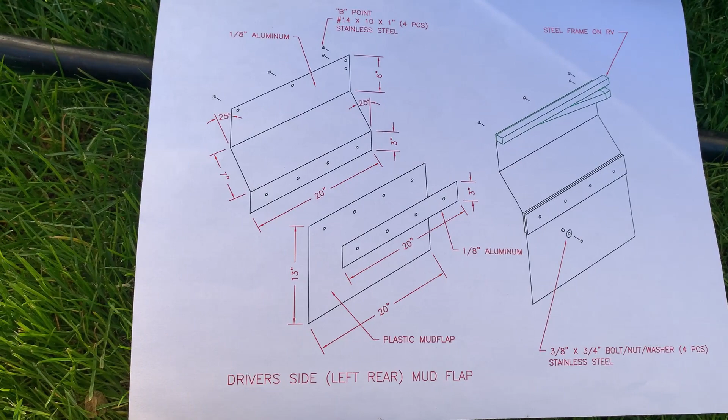So I want to show you the drawing first and go over all the pieces and parts before I show you them on the RV. This is the driver's side, just to give you an idea for orientation. This piece here is going to be the main mud flap, made out of 1/8 inch aluminum, and I have all the dimensions here, and even the angle. And then these holes here are for mounting the back plate.

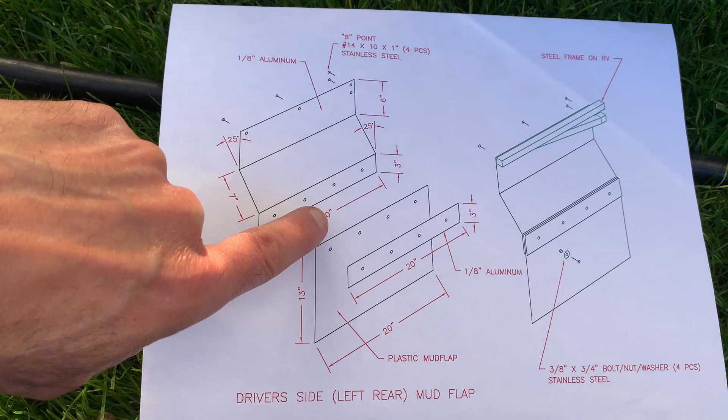The back plate is also aluminum, and I have the dimensions there. And then this piece is actually the plastic mud flap. This piece and the back plate are what you're going to need to fabricate out of 1/8 inch aluminum. If you have access to 1/8 inch plate and can bend this yourself, then awesome, cut it up, do whatever you need to do.

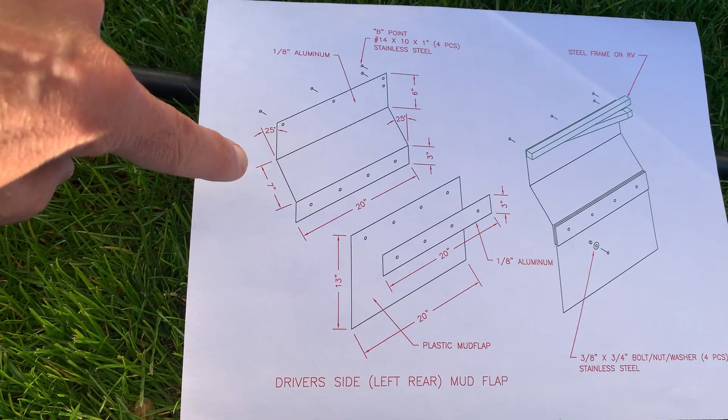If not, you can always find a sheet metal shop, like I said. This side of the drawing shows where it's all connected - you see the back plate, the mud flap at the bottom, and where it attaches to the structure. I'm going to show you that under the RV.

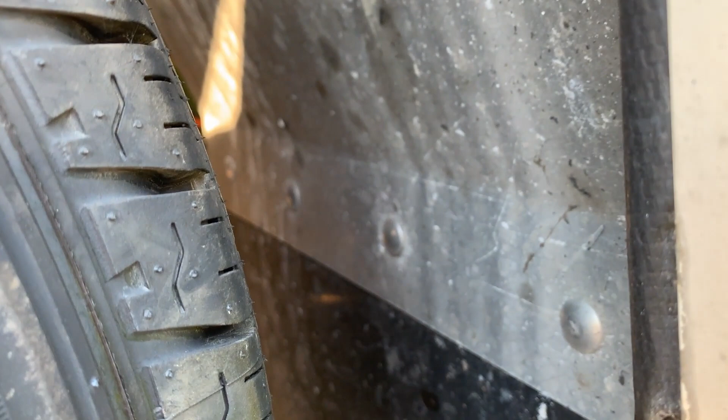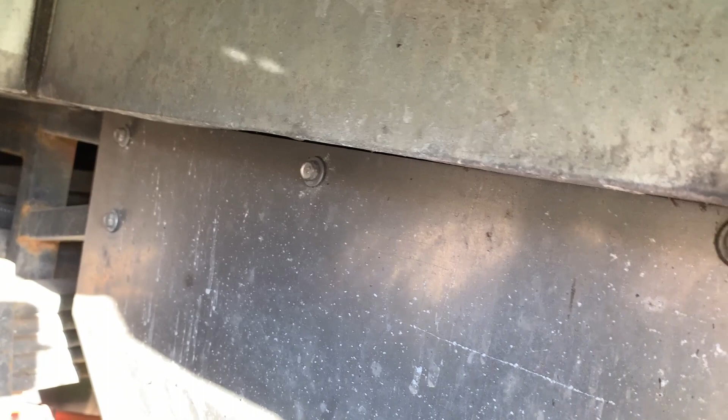Right now we're looking at the main body of the mud flap. You can see at the bottom it comes up, angles, and attaches right back up into the frame. There are 3 fasteners on top, and 1 fastener in the back attached to the bracing to keep it from flopping back and forth. This is the main body of the mud flap.

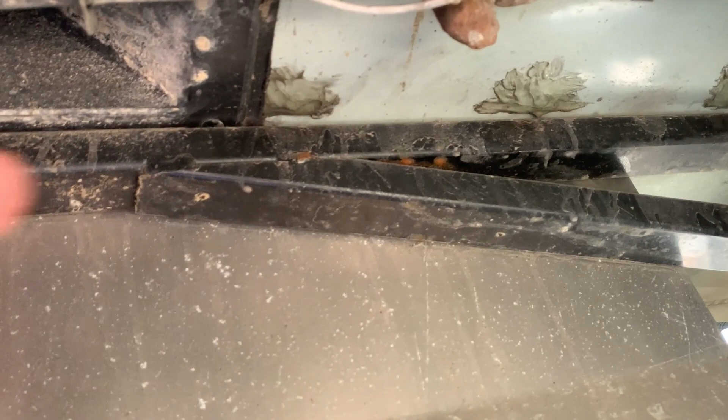This is the inside, and you can see that lateral brace as it goes across. You won't see the fasteners sticking out because they're only fastened on one side - they're not through bolts. They just fasten into this piece of steel. So again, that's the main body of the mud flap.

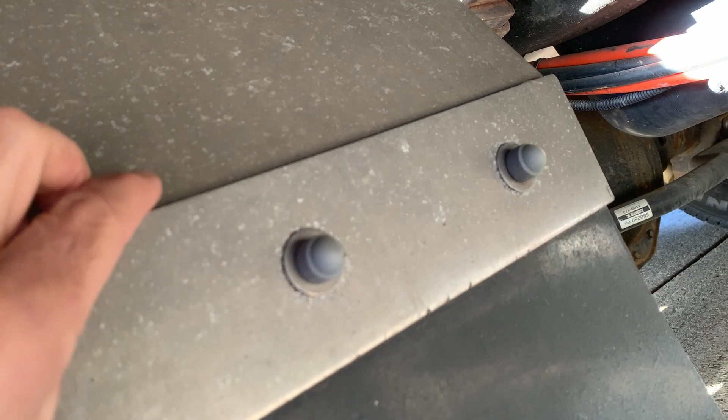Now this is the 3-inch wide back plate, and this is what's clamping the plastic mud flap to the main body up here.

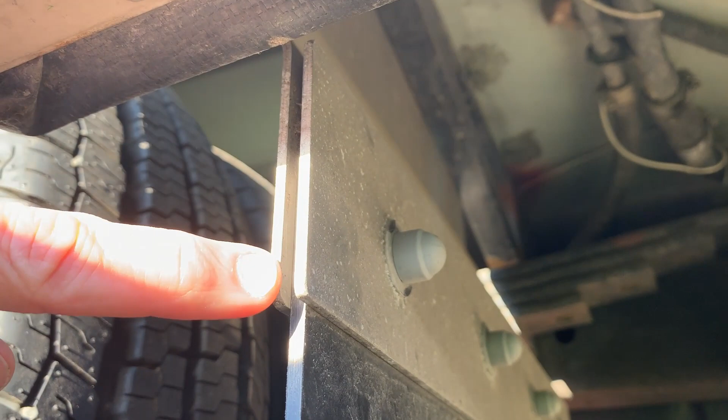Here's a side view. This piece here is the main body, then I have the plastic mud flap here, and then the back plate that's attached. As I swivel around, you'll see the front of the fastener, the carriage bolt side, is nice and smooth, so it won't catch any dirt or anything.

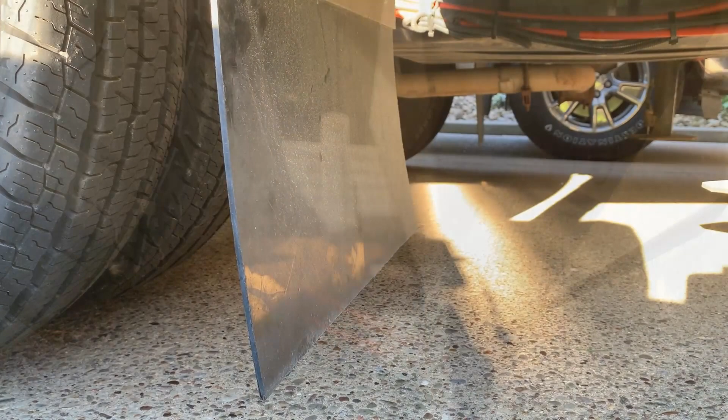The reason I did this 2-piece design is because I wanted it so that if it caught the ground, it could bend. There's actually scratches on the back already, but this piece is replaceable. So if I go over a curb and this snaps off, it's not going to damage the top aluminum here. This is sacrificial, this is breakaway, this is throwaway - I can replace this no problem.

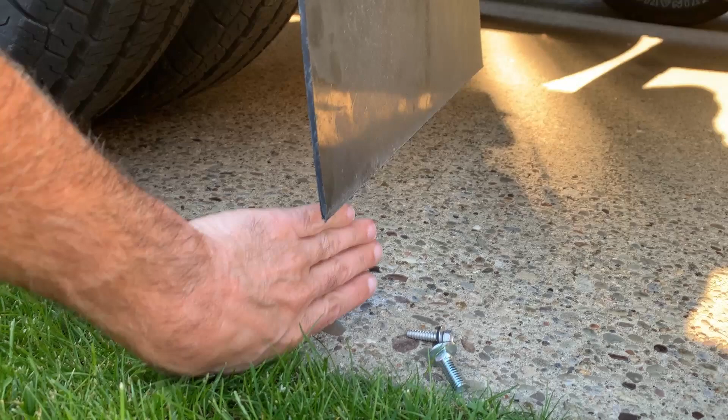You can get this at any truck store, just a basic mud flap. But as you can see, it's not that far off the ground - I only have about 5 inches of clearance.

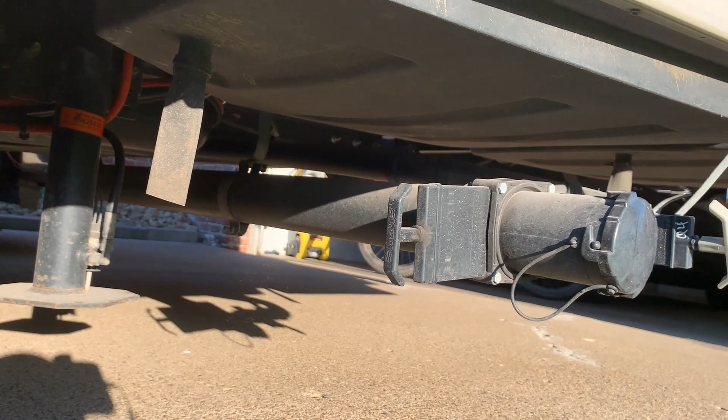What is it protecting? It's protecting my dump valve. I've got my dump valve here, and it's important because when I get into a campground, all the mud and grass catches here. Before, I would have to clean my dump valves off because they'd be covered in mud and all kinds of grit, and it was a pain, especially when traveling for a while.

So these mud flaps - the reason I made them was for protecting everything in the back here. All right guys, there was one more thing I wanted to show you, and I tried to find it but couldn't.

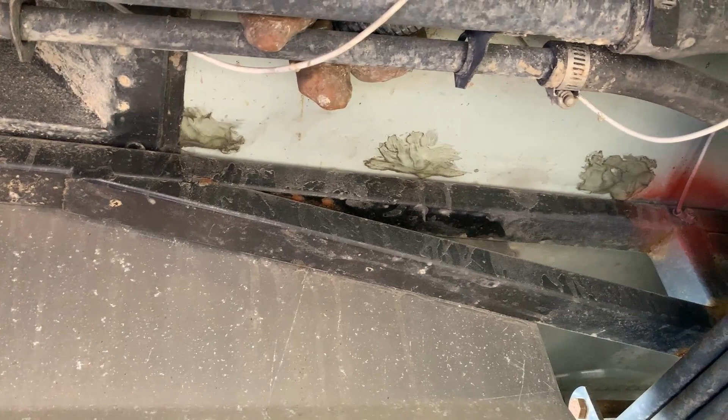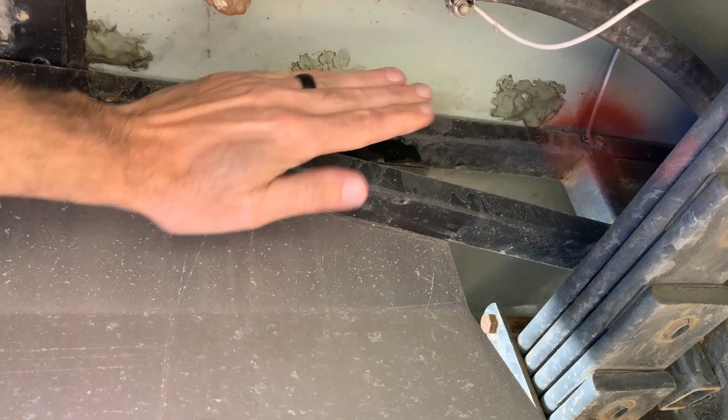There was a shield here - 3 holes in the bottom of the RV, and a piece of black metal that came down about this far. It came up and over about 1.5 inches, with 3 screws into the bottom of the RV. What did that protect?

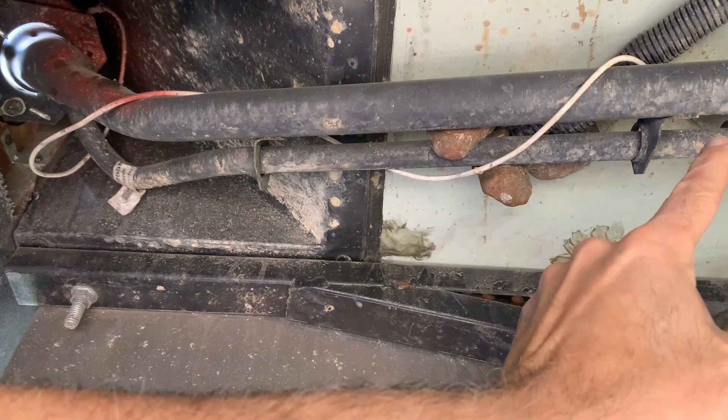This is my gas filling tube, and this is the vent line. What this did was protect against stones and nicks coming off the tire from hitting these lines.

Before I installed my mud flap here, I took this piece of metal off, and I think I threw it away because it was starting to rust anyway. Once I took the screws out, I used urethane caulking and sealed the holes up. It doesn't look real pretty, but it's effective, and there haven't been any leaks or cracks.

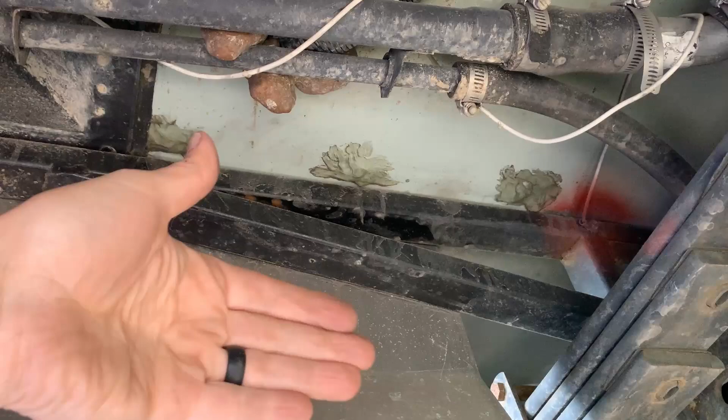But if you guys look under your RV and you see a piece of metal here, and mine doesn't, it's because I took it off on this side.

All right guys, we're here at the workbench, and I'm going to show you the tools that I used and how I was able to assemble everything together, including drill bits and just the little nuances that may make the installation go a little bit easier for you guys.

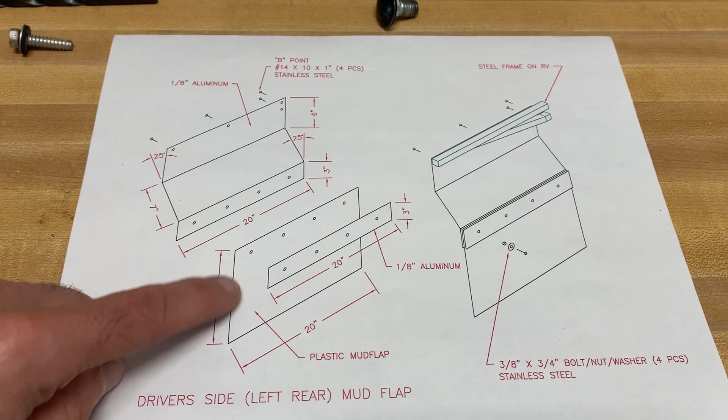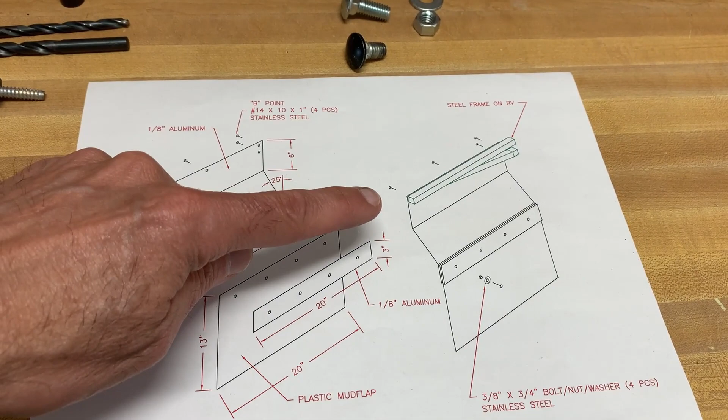So once you have the main body and the back plate and the actual plastic mud flap made, the first thing I did was I attached the mud flap to the main body with the back plate. The reason for doing that was basically just to adjust back and forth, up and down once I get it up into the wheel well, and looking at how I'm going to attach it to the brace.

Now your RV should have the same brace, but there may be some nuances here, so you definitely want to check that out before you start drilling these top holes.

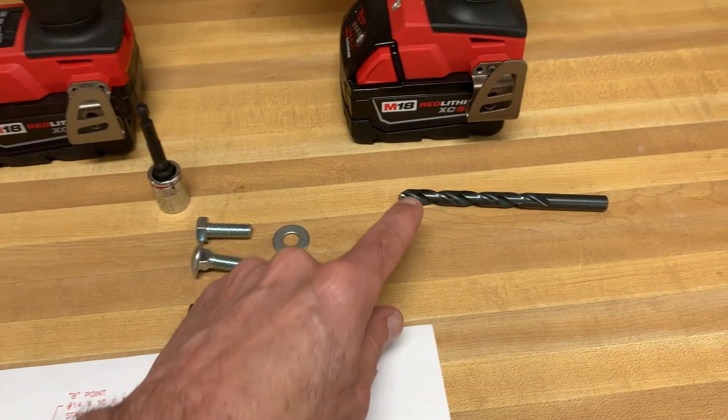Okay, so I used a 3/8 inch drill bit and a drill, and I drilled out the back plate, the mud flap, and the main body here.

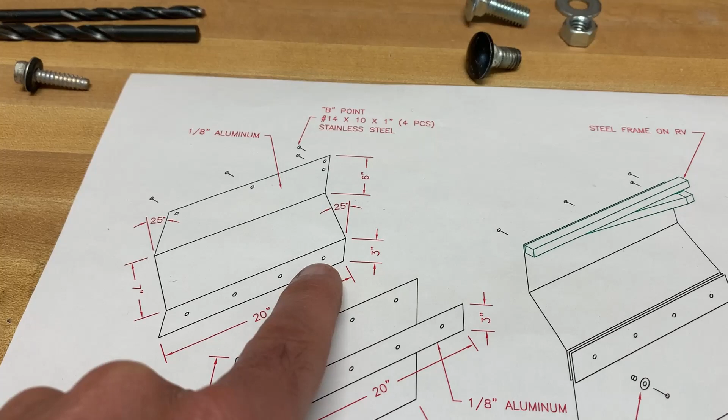Now the spacing on this, being that this is 20 inches, basically these holes are centered in the 3 inches, so it's 1.5 inches down. And then it's 2.5 inch spacing on this side and on this side, and then I had 5 inches in between. So that's 20 inches, and that was the spacing, so it kind of looks nice and looks factory.

So because I was using a carriage bolt, these carriage bolts have a square head on the back, and you're wondering, well, I'm using a round drill bit and this is square, how are they going to seat?

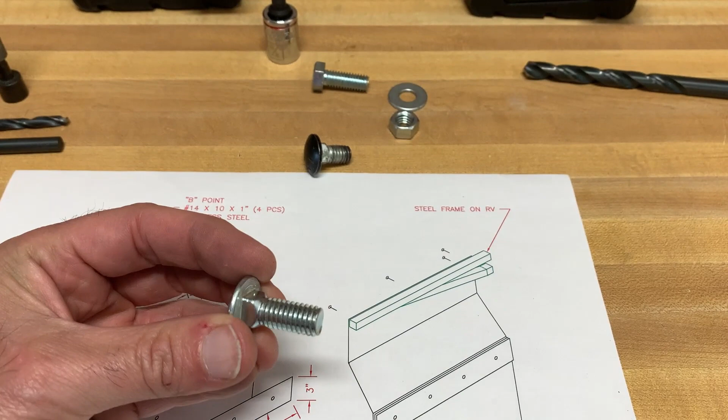Well, the aluminum was pretty soft, and what I did was I took that 3/8 drill bit and I bumped it up maybe a little bit larger, and what I did was I took a hammer and I hammered in the back of the main body to make sure that this seated properly.

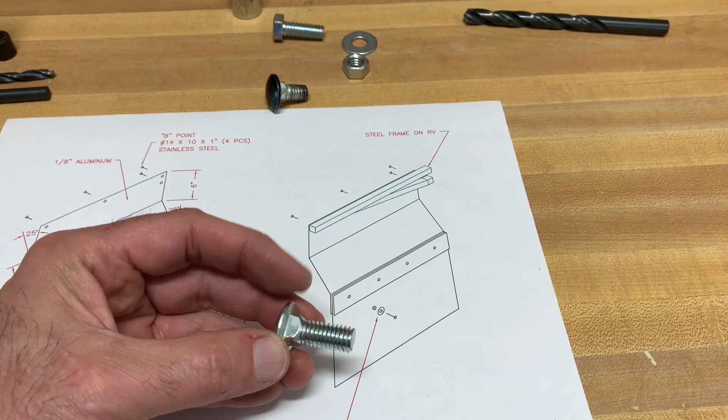And then if it didn't seat 100%, that's fine. But what I did was I took my impact socket, so this was something that would go right into an impact. And I put it into the tool, and I used—let's see, what size is this? This is 9/16.

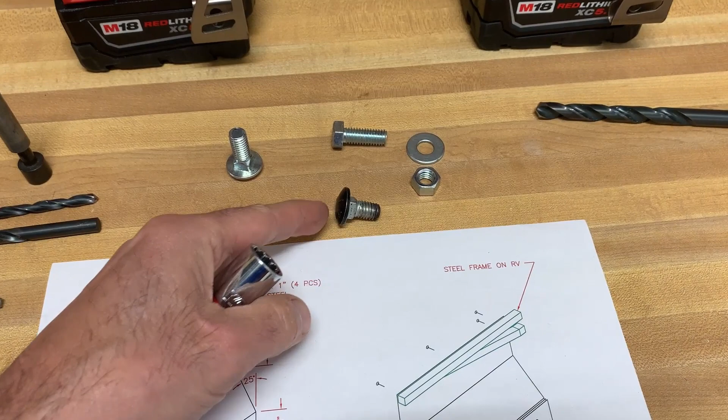I basically used this and I seated it. I made sure that the carriage bolt was basically jammed in or pounded into the main body, and then I used this to run the nut in, and basically that sucked it up and it didn't even allow the carriage bolt to move. So if you're able to do that, that was easier for me.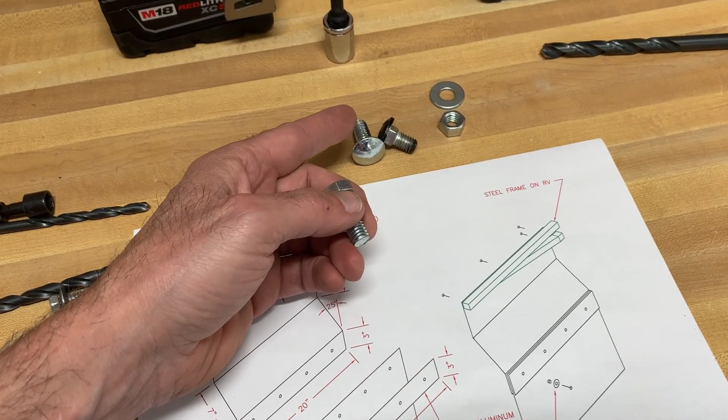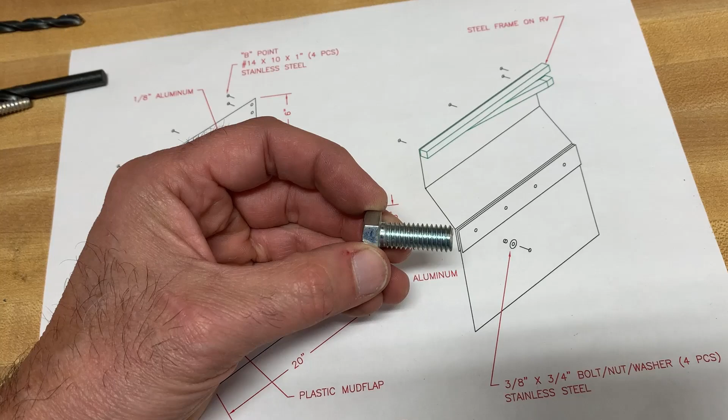All right guys, I know I showed you the carriage bolt method for attaching the back plate and the mud flap to the main body, but you can just use a regular hex head bolt. It's going to be easier. You won't have to worry about the carriage bolt spinning off. I was able to do that, but let's face it, if you guys can't do that, you can definitely use just a regular hex head bolt. It's not the end of the world. So you drill it out, you hold it, use a wrench in the back.

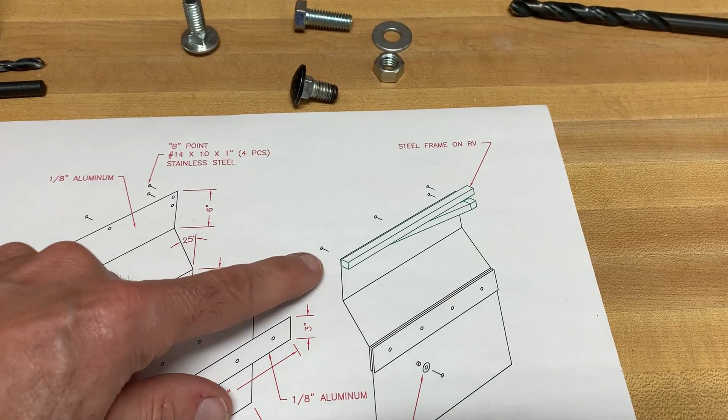It works just fine. Now, to do the attachment to the RV, you have to double check your structure on the RV to make sure that this is the configuration that you have. Once you've confirmed that, you have to make sure that the fasteners are centered.

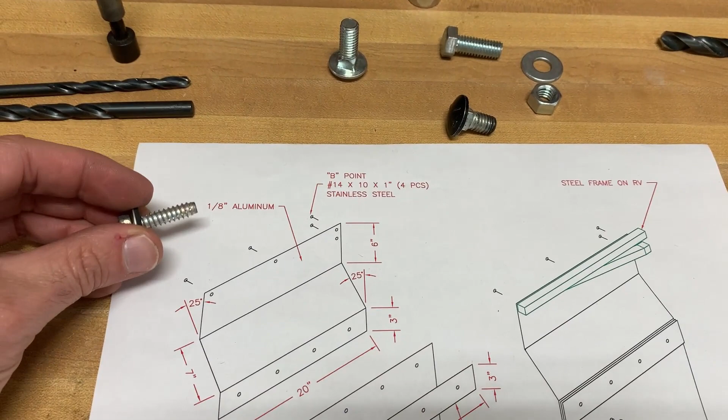This is 1-inch square tubing, which is what makes up this piece of steel. So 1-inch piece of steel, I had 1 inch long. As you can see here, number 14 by 10 by 1 inch. And plus it's got a washer, and it's got the thickness of the mud flap which is 1/8 of an inch, so this didn't bottom out on the back side of the tubing.

All right guys, so I needed to make one revision to a comment I just made in my video, and that was the size of these tubes.

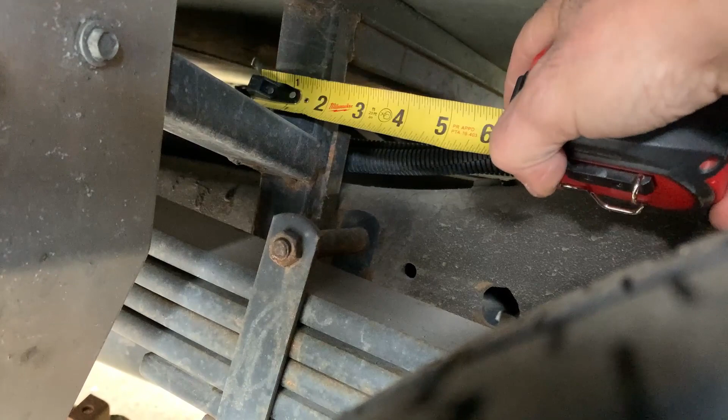I looked in here after working on the video, and I saw that they were a little bit bigger than 1 by 1. The width of this is actually 1.5 inches, with 1.5 inches of depth. So that 1-inch fastener has 1.5 inches to embed itself into this steel. The vertical section looks to be about 1 inch. So you have a 1.5 by 1 inch piece of steel holding these mud flaps on. You can see one side is shorter than the other, so they're definitely 1 by 1.5 inches. I just wanted to clarify that so you guys knew.

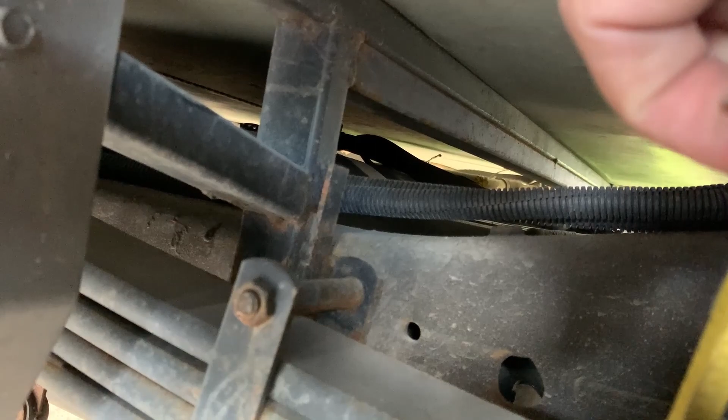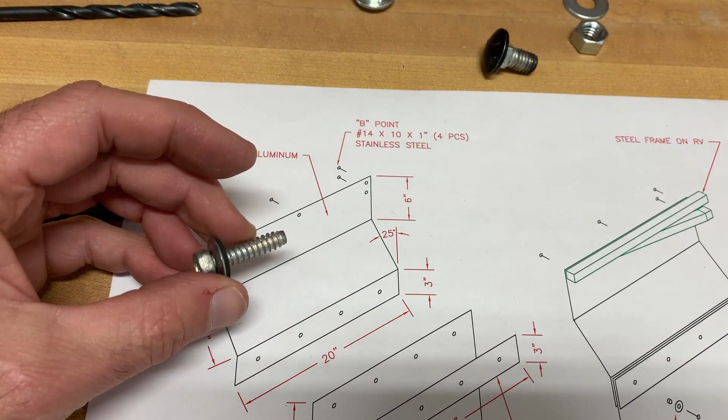So what we do first is drill out the holes once you determine where they're going to go. I used a drill bit that was larger than the actual fastener itself, because when you install this, you don't want the mud flap tracking up on top into the bolt, climbing up the bolt while you're trying to get it in. You want it to be loose.

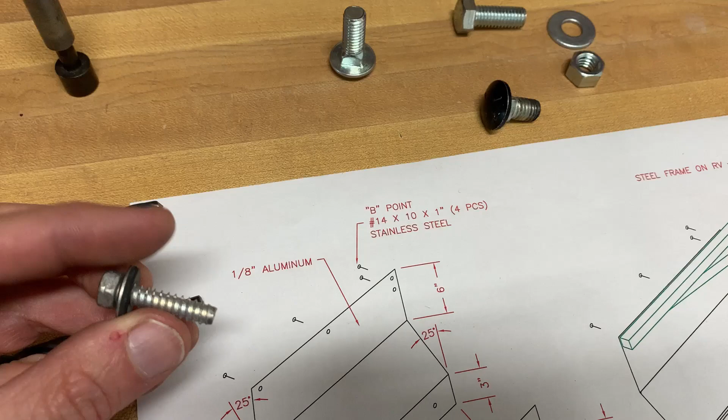So you drill that, you drill the mud flap, then you take a number 1 drill bit. This is a B point, meaning there is no point. B means flat, and that's what I'm using. The reason why I use this is because it's thick, it's strong, and it's stainless. I like the stainless bolts.

So you take a number 1 drill bit and you drill out the steel, and you make sure that it's all nice and reamed out, no burrs or anything.

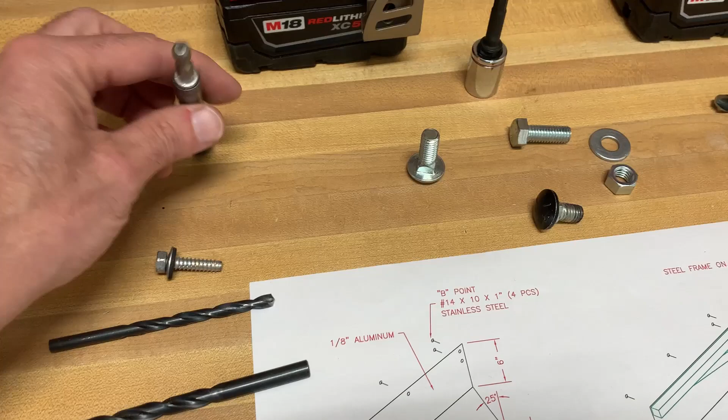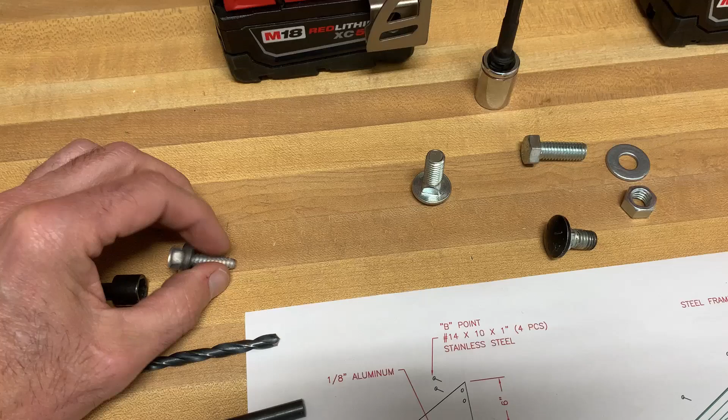And then what I ended up doing is I used my impact. I made a little socket, a little extension, and this head here is 5/16. And again, this isn't going to spin. So I lined everything up and just drove it right into the RV, and it went in no problem. I didn't have to use the drill.

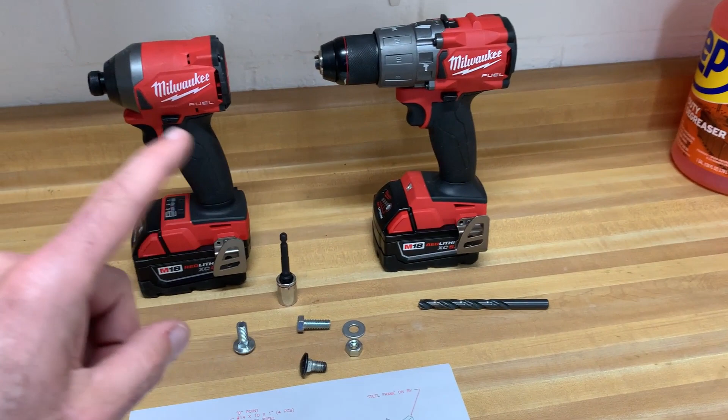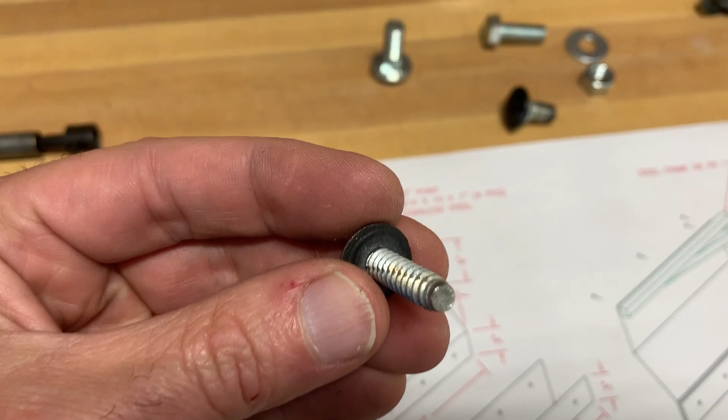Using a drill is possible, but if you have access to an impact, it runs these in so much better. The reason I use an impact is because these threads are self-tapping. There's little V grooves in there that tap the steel and make it real strong, putting threads in there. When you use an impact, as you run it in quickly, it cuts quickly, versus using a ratchet or something manual. If you can use something mechanical to drive this in, that's the best way.

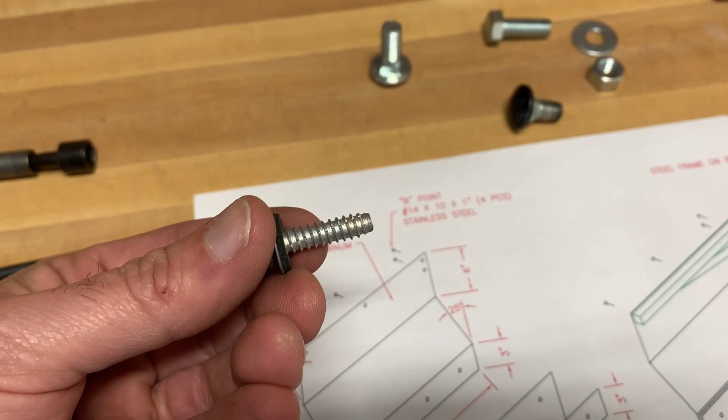Just don't overdrive them. You could take a ratchet to finish them up, but don't overdrive these because you'll strip out the hole and have to go to a bigger fastener or move the hole. All right guys, that is all the tools I used to install these mud flaps.